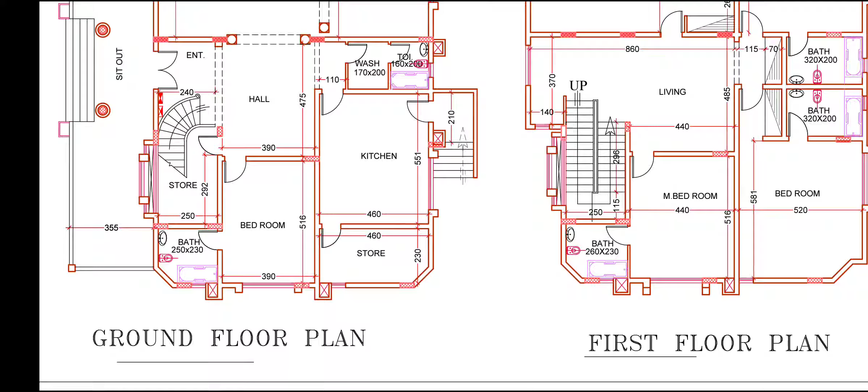Everything is there. Our entrance is from this side, we are getting in from here. You can see our boundary is 355 by approximately 20 meters. So this is our sitting area and this is our entrance, we are entering here. This is our ground floor.

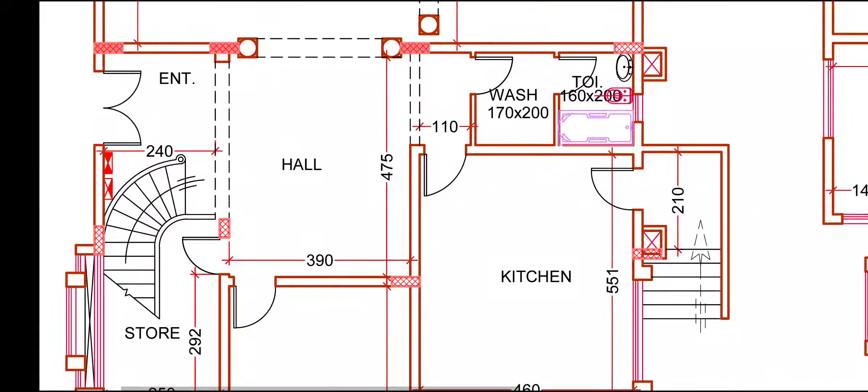Keep in mind this is our ground floor. We will discuss the ground floor, then go to the first floor. Let us start from here. This is our hall, 390 by 475, and this side a very wide hall and dining, everything included here. 575 by 680. You can see this column design and this arch.

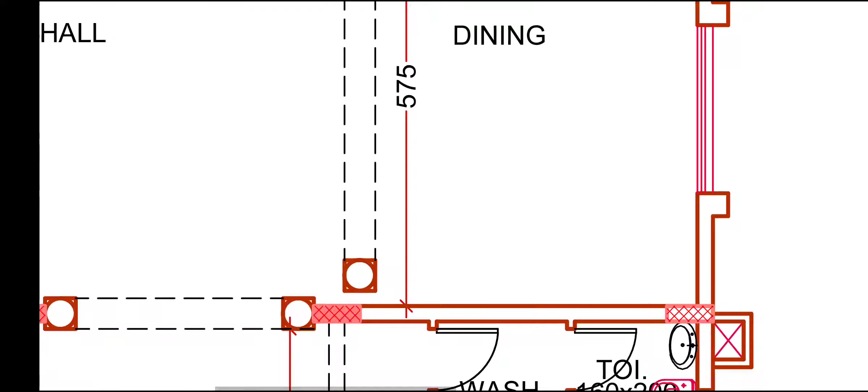This is the division for interior design purpose. So you can keep your dining table and rest of the things here. This is our dining area, again with a wonderful arch with column. So we are getting the side bedroom, 516 by...

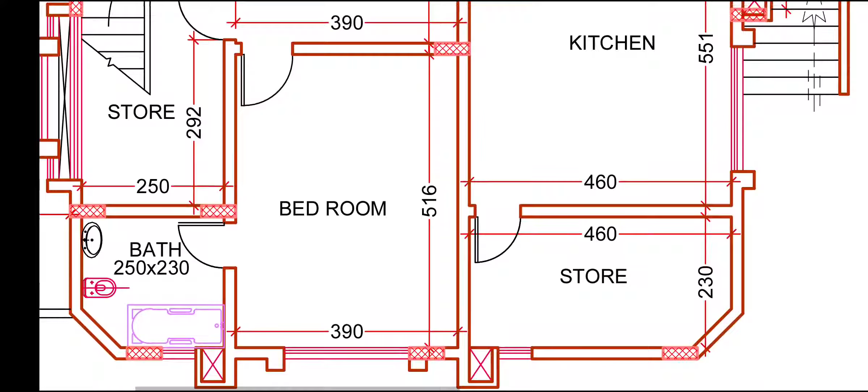Thank you very much. So this is 516, we have the bedroom and 390. This attached bathroom is 250 by 230 centimeters. You can see here this is our store. From the stair down part we have provided a 290 by 250 store.

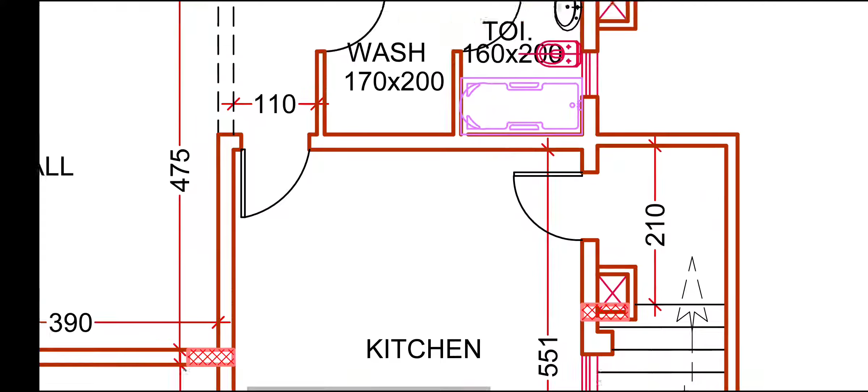So we are coming here, this is our kitchen, wonderful kitchen. With the living and dining we have a common washroom and toilet, 170 by 2 meter, 160 by 2 meter. This wonderful kitchen is 460 by 550 and this is our store, 460 by 230. The store you can customize for your maid room or anything else, whatever you want.

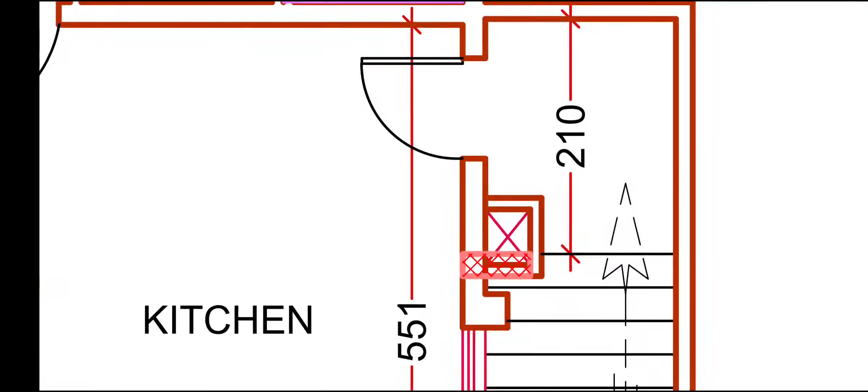This is our backside entrance, 210. So this is our wonderful ground floor plan, covering generally one bedroom, store, kitchen and attached bathroom with bedroom, one separate store again, toilet, washroom, dining - very wide dining and a very wide hall.

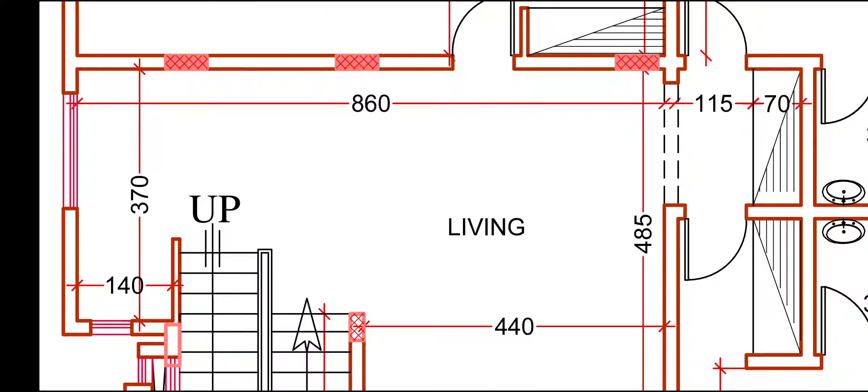Now we are reaching our first floor. So we are getting a wonderful very wide living room, 440 by 485, and this side 860. Now we are getting this bedroom, 580 by 575, and this side we are getting a wide dress area, 265 by 280, and this side also we can keep our cupboard.

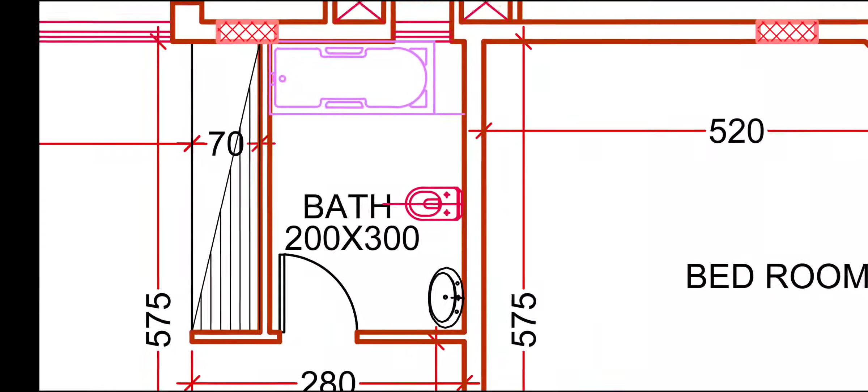You can see a number of two cupboards we can adjust here, this 70 centimeter, and this is attached bathroom, 200 by 300 centimeter. Exhaust we have given this way. You can see this small duct coming like this for the design purpose, for the elevation design purpose we have placed it here like this.

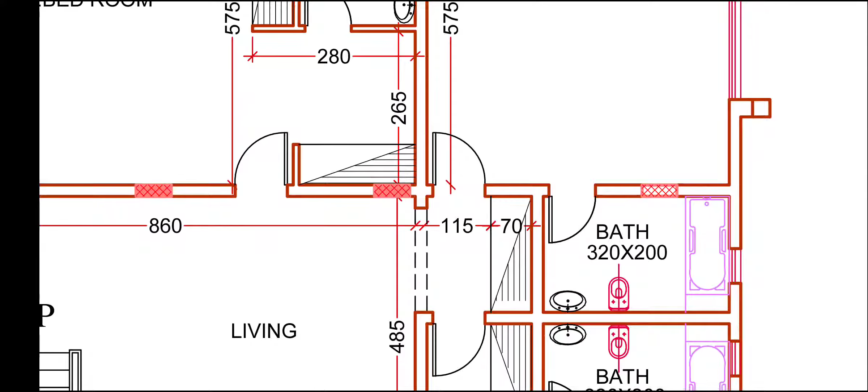So again we are getting here another bedroom, 575 by 575 by 520, and this attached bathroom here, 320 by 200 centimeter. This again you can keep your cupboard outside, or otherwise you can keep it inside also, no issue.

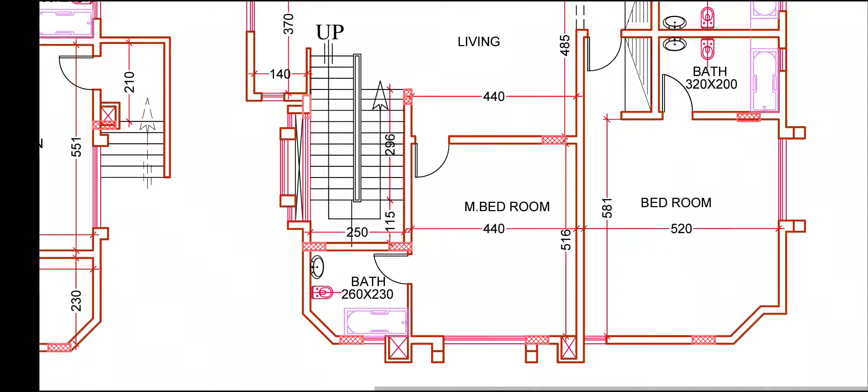Again we are reaching this bedroom, 580 by 520, and this attached bathroom, 320 by 200 centimeter. We already discussed this bedroom, 440 by 516. So number of 4 bedrooms here we have wonderfully, and 1 bedroom on the ground floor. So this G plus 1 has 4 bedrooms on the first floor, 1 bedroom on the ground floor, and kitchen, dining, hall, wonderful store and unique design.

Now we will see our window. We have given this hall 2 side windows, one here, another here, and this dining we have given a window on this side. Coming to our washroom toilet, we have given this side window for our duct purpose, for exhaust and ventilation purpose. This kitchen we have given this side, and we have provided this store here with a small window.

So this is our bedroom, we have given our window this side, and this is our attached bathroom. This is something very unique, something very confusing why we have made it like this - because for the purpose of elevation design I have made it like this. The reason I designed my elevation this way is to make it very wonderful.

We are coming here, everything same. You can see this part coming continuous up to the first floor, and here we are getting a window, and again here we are getting a window. We are getting windows on this side also and this side also.

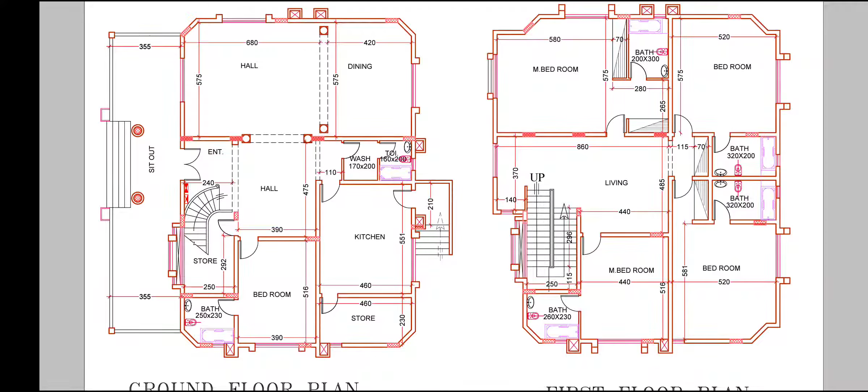For the bathroom everywhere we have placed our exhaust, and this is our bedroom. So wonderful. Everywhere window, doors, everything is arranged in a very proper way. Even you can see here our furniture layout also, everything added like shower tray, wash basin, water closet.